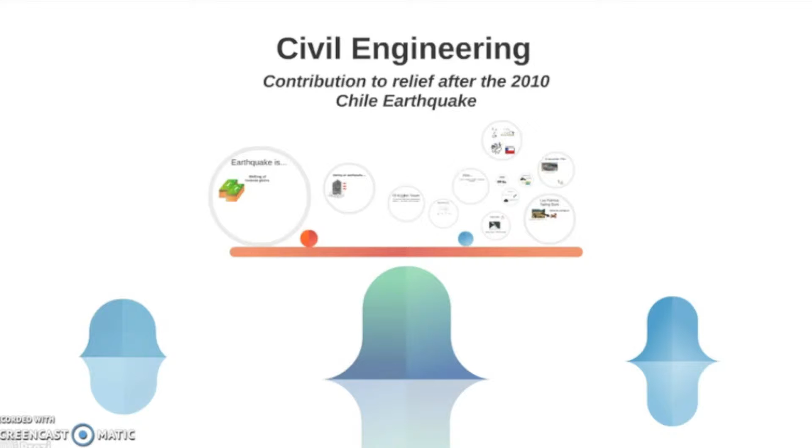Today we're going to talk about the devastating social and economic impacts of the 8.8 magnitude Chilean earthquake on the 27th of February 2010, and how civil engineering can help develop solutions to address these problems. An earthquake is the perceptible shaking of the Earth's crust due to the shifting of tectonic plates. During an earthquake, public infrastructure is greatly affected, which is why we need civil engineers to design and build safer

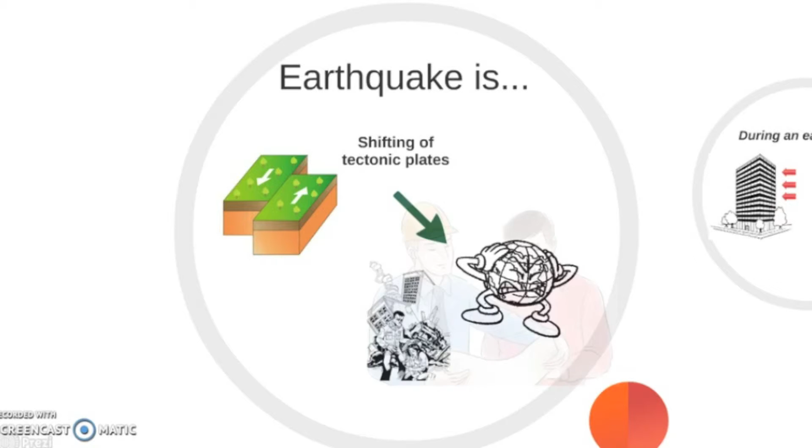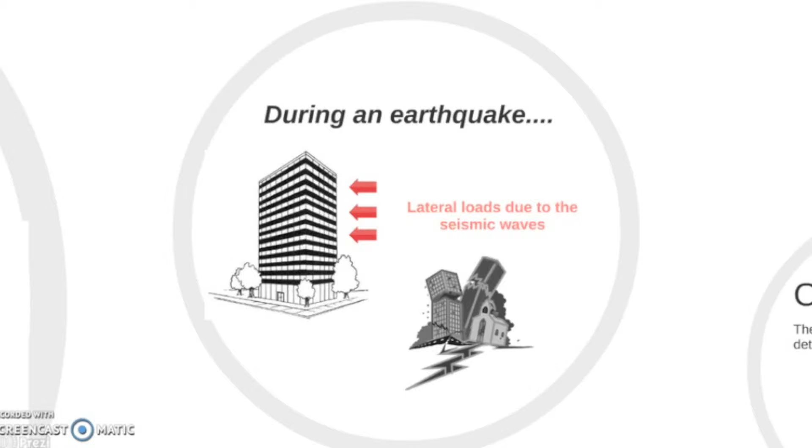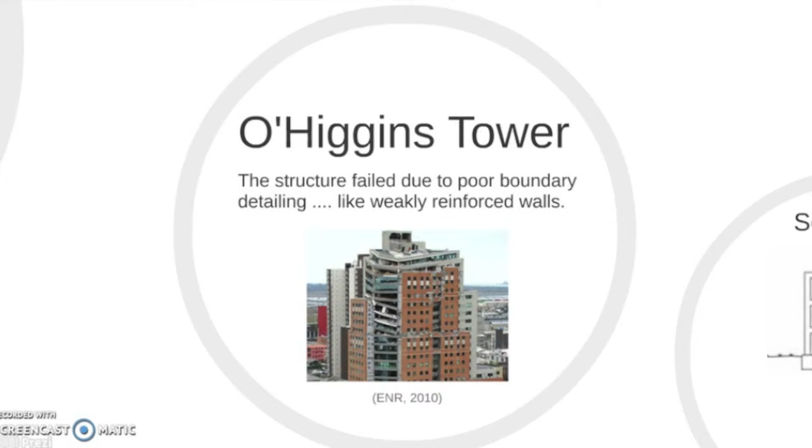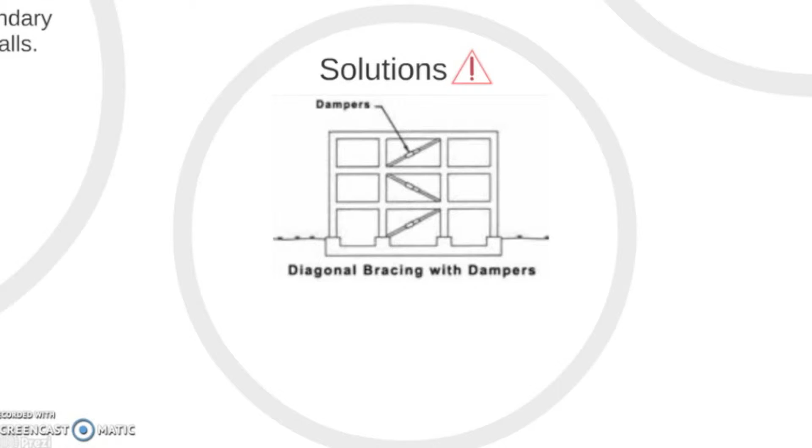structures. Buildings collapse during an earthquake due to the lateral loads imposed on the buildings by seismic waves. Structures undergo cyclic loadings to the point where they fail. Poor boundary detailing, such as weakly reinforced walls, caused the O'Higgins Tower to collapse. All the vertical reinforcements in the walls deformed largely and failed. One of the solutions is that structural engineers could introduce diagonal bracings and dampers to buildings. Bracing and dampers provide a structure with larger lateral resistance and decrease the amplitude of structural vibrations.

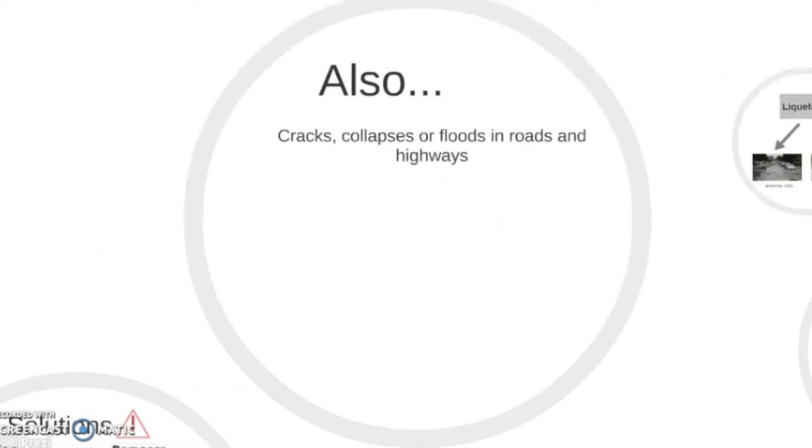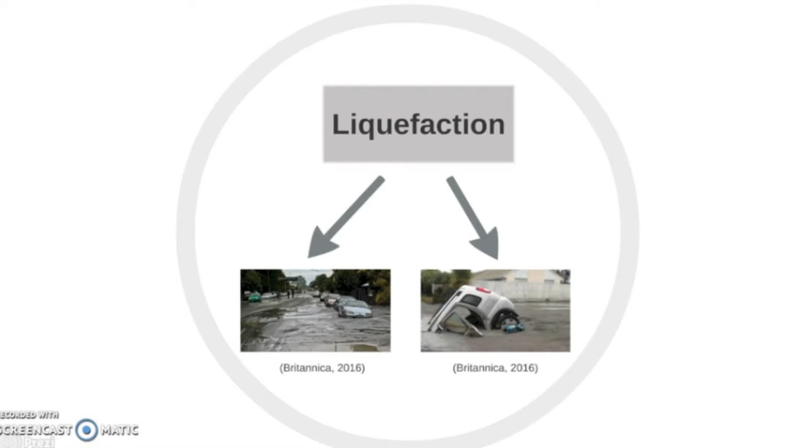During an earthquake, many roads, highways and bridges become unusable, be it due to cracks, collapses, or floods. These were the result of improper soil compaction leading to liquefaction, which is a phenomenon where saturated soil loses its strength and stiffness, and thus acts like a fluid under these forces. As a result, delays in logistics companies occur, education and work are halted, productivity is lost, and resources are spent.

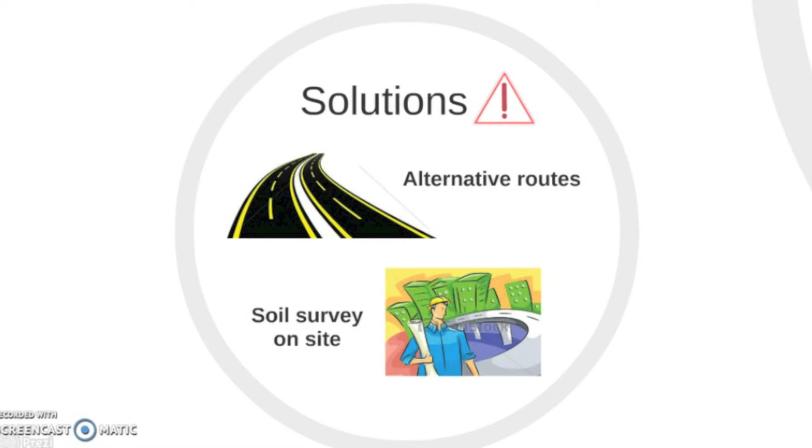In these cases, short-term alternative routes should be set up immediately. Engineers should also survey the soils on the site beforehand and carry out preventive measures accordingly, such as granular soil compaction to prevent liquefaction.

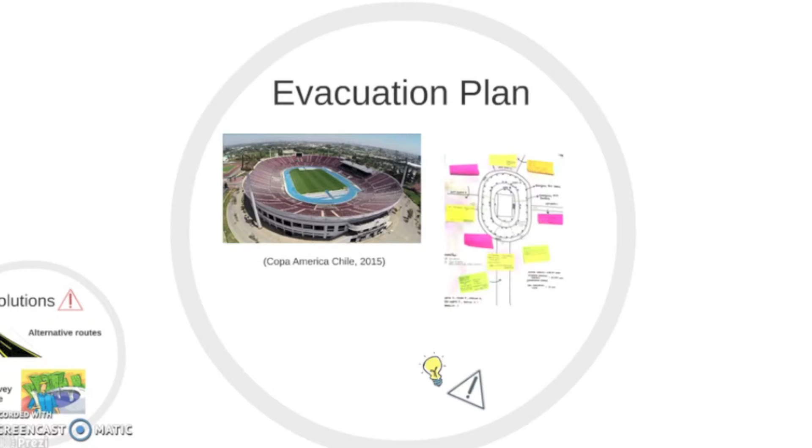Another aspect to consider during an earthquake is the evacuation plan for large public spaces such as sports venues and stadiums. The National Stadium of Chile has a capacity of more than 48,000 people, which is potentially dangerous in the case of an earthquake. Important aspects of evacuation include crowd control measures, accurate signage, and safe zones that can accommodate the whole crowd.

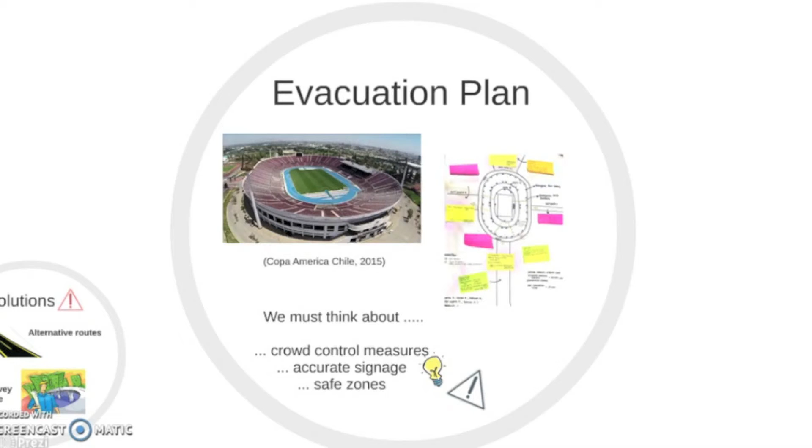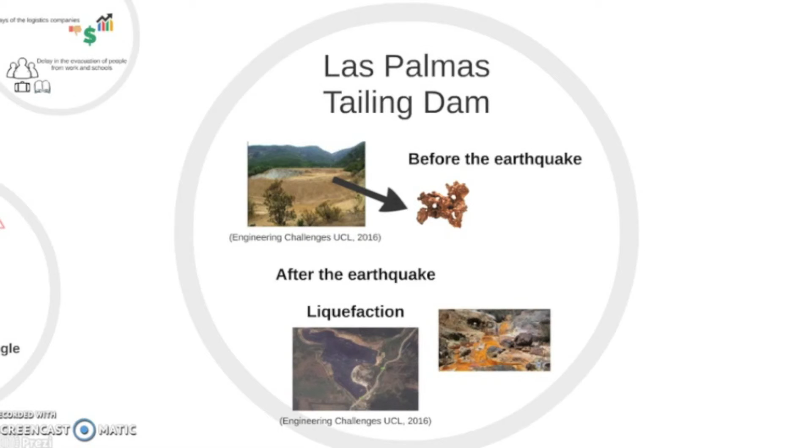The Las Palmas tailings dam is a deposit for copper ore residue. When the earthquake in Chile occurred, due to liquefaction of the soil, there was a landslide of tailings traveling 500 meters. This incident caused the soil to get contaminated and triggered a great economic loss for the copper mining industry. To prevent the landslide from happening, civil engineers should lower the inclination of the dam's slope such that it is far less than the friction angle, which is the maximum inclination that a stable slope can have.

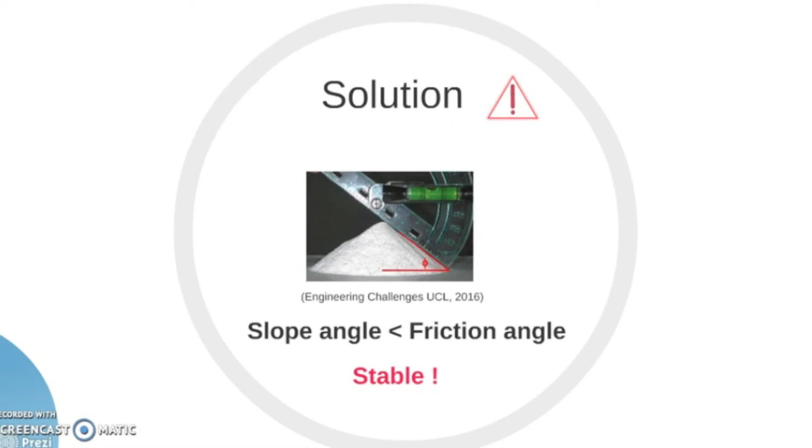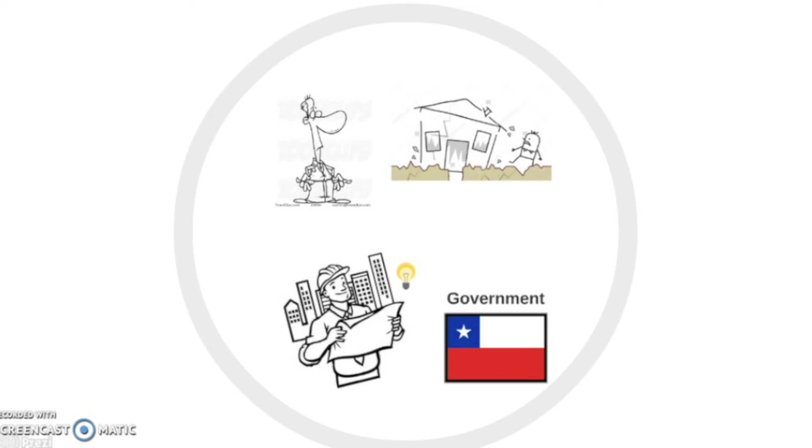In conclusion, the 2010 Chile earthquake caused significant financial loss and many casualties. Hence, it is crucial for an engineer to place great importance on considering safety margins for their designs. Also, the Chilean government should support better engineers who possess the power to push the boundaries of people's desire for monumental yet safe structures.